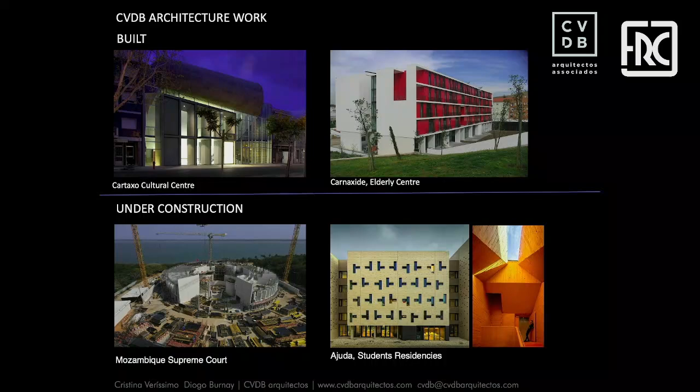Our work is mainly public work because we work through competitions. We apply to competitions, and luckily we win quite a few. Just to give you a few examples, the ones on top were built.

The one on the right is an elderly center. We recently won a competition for a residence, but in this case for young people, so we're going to have another building there. We're also under construction with the Court of Law, the Supreme Court of Law of Mozambique, and this is the students' residencies that will be finished next week or so, it's almost done.

We also, like Sergio was explaining, had a wonderful experience with the Lisbon Triennale, which we called Terra, about issues of the planet and transformations, and what we have to think about in terms of architecture. We had a wonderful team of curators, with 5 exhibitions and 5 teams of curators. It was quite a huge event that finished in 2022.

We are now Biennale curators for Latin America, which is going to take place in Peru this month. So, this is now.

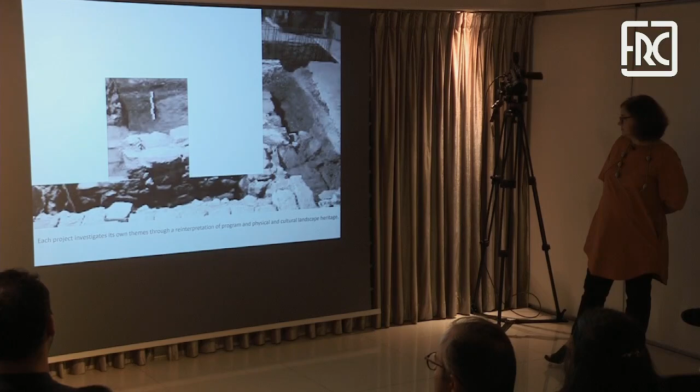So today we're going to dedicate this lecture to our heritage work. We're mainly focusing on a few topics, such as in terms of architecture, how can we create a balance between what we manage to do and the existing buildings. Remember, we're in Portugal—public buildings, not a lot of money—so we have to create the best with very little. We always look into what exists, so it's a constant survey of the existing building, and sometimes in one design we find archaeological items that we then include in the design.

Improvement—of course some buildings are in bad condition, some are in ruins. We have to adapt them to the legislation now, and we always want to preserve them for the next generation. So seismic laws and structure need to be included. The design character is always the symbolic means between the old and the new.

We're going to show you a few different things—how do we deal with that? Proportionality of interventions: how do we keep, and how do you select, basically.

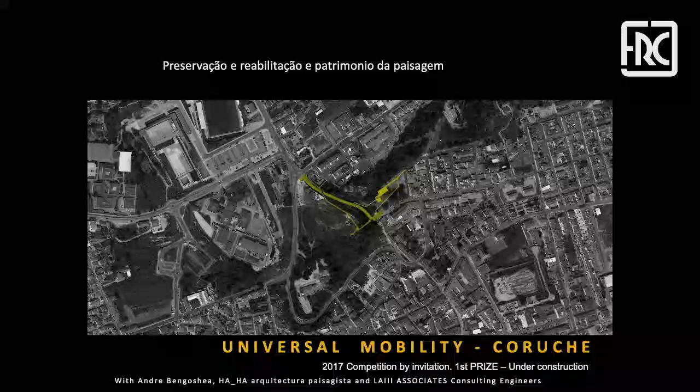There used to be a castle over here, and now what they kept is pretty much this area, totally green, as you can see. This is the old city, and this is the new city. What's important for you to understand is that this city, from the low part to the upper part, is quite a huge step.

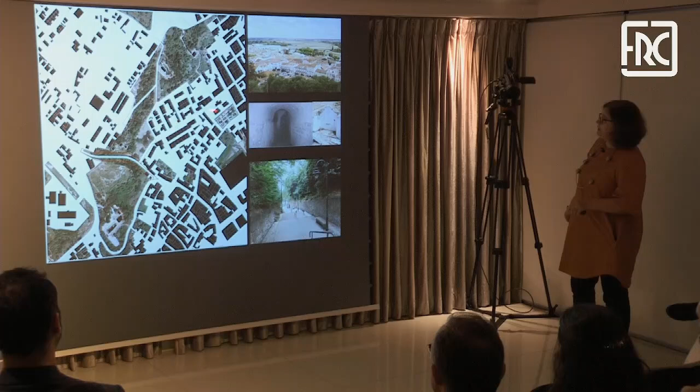The town hall came to us and said we need to have universal mobility—our old people need to go to the hospital. Most of them live down the hill or in the old city, and our hospitals, schools, and administration are always on the top side of the hill, so people always go up and down.

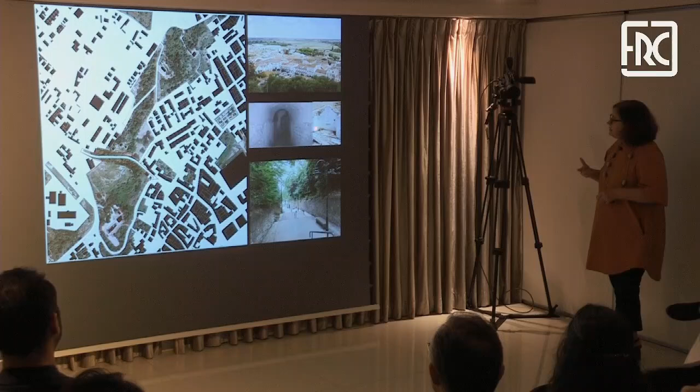So this is the view from above; the river is over there. Now, a long time ago, Gonçalo Ribeiro Telles rehabilitated the underground of this area, which contains fresh water for the population. It was done through an underground system that we visited, and sometimes there are fountains over here.

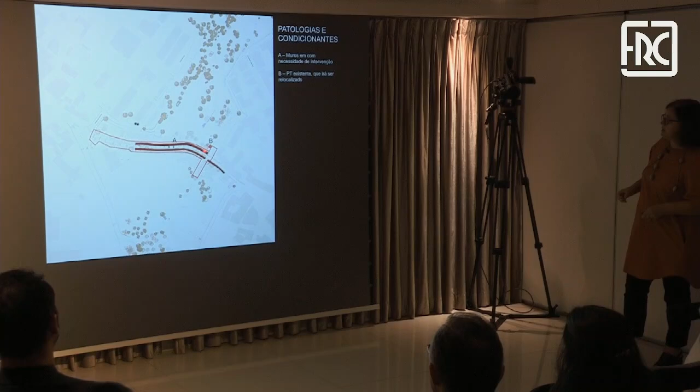One thing you'll notice is that the staircase was pretty much collapsing. The population did not want us to change anything. Even though they were coming up and down, it was very hard work for us to explain to them that very soon the cliffs might fall down, so we had to do some maintenance and recuperation. For me it was a long, hard process between administration and the population, because they didn't want anything touched. After we started talking to them, they shared what things they were interested in keeping, and we were very attentive to that.

We had a huge area, like I said. In terms of natural areas, a lot of the trees were not local, so we had to separate and clean the species, the natural vegetation. We also included wet areas such as fountains and paths, which the population was very pleased to find out. And this is the staircase that we rehabilitated.

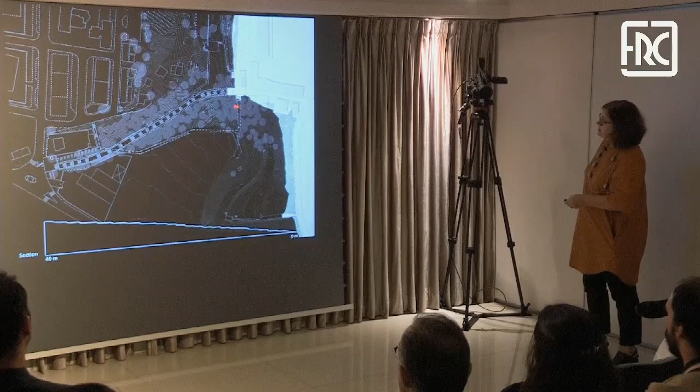By universal means, we included an elevator. That was also discussed with the population, and they really liked the idea. On the left side are the existing areas, and these are the bridge, paths, and fountains we rehabilitated. They're still under construction, so vegetation will grow, but this is what we're doing. The next slides will show you how steep the slope was, 40 meters, that people had to walk up.

This is a sequence from the elevator to the top, showing the universal path. People go up through the elevator and keep going up until they reach a platform already on top of the hill. There's a sort of viewpoint shown in this model. Then the universal mobility path goes across the staircase and reaches one of the highest points there. So universal access was achieved by creating this path that brings people vertically and then horizontally to the connection.

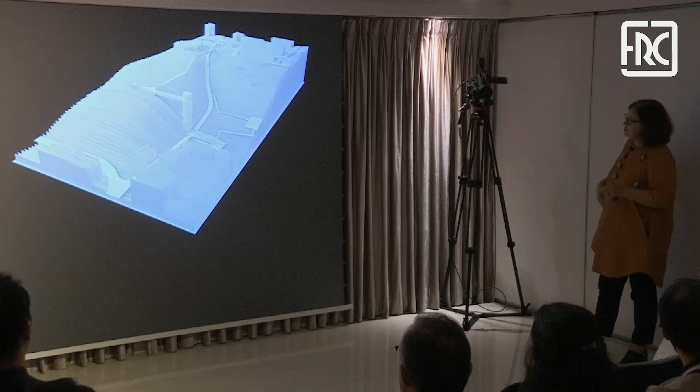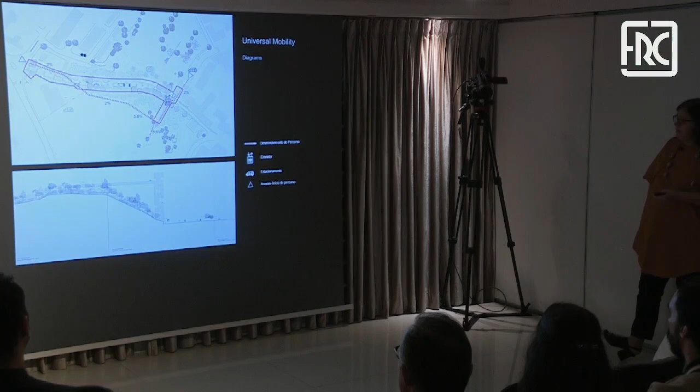The elevator is very simple. It's just a vertical tower with viewpoints and transparent spaces for the population to enjoy the view. And as I showed you, it's an amazing view.

So this is another interesting situation, in the city of Torres Vedras. This was the location. Interestingly, this was pretty much a row of houses, with a building in front of a square, and the population, not unfriendly but out of habit, would literally cross a private property to go up to the other part of the city. This is the lower area. They would cross through the building and go up. So it was, let's call it, an informal connection.

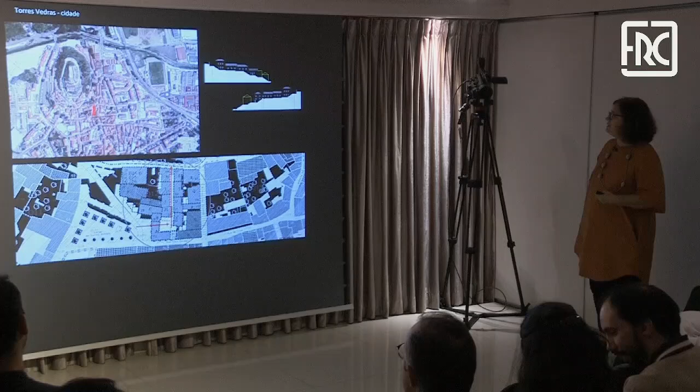When this art gallery project came to us, we said, why don't we turn this public? Instead of keeping it informal, why don't we turn it into something formal, with the advantage that we can create an art gallery? So in terms of design, it's like almost a box inside of a box, but we allow the public connection to go under, across, and up.

Now, to bring art to the population, as you can imagine, was very successful. The population would go through rooms in the building that of course had art, but they would interact, and through their path they could see art, which was very successful.

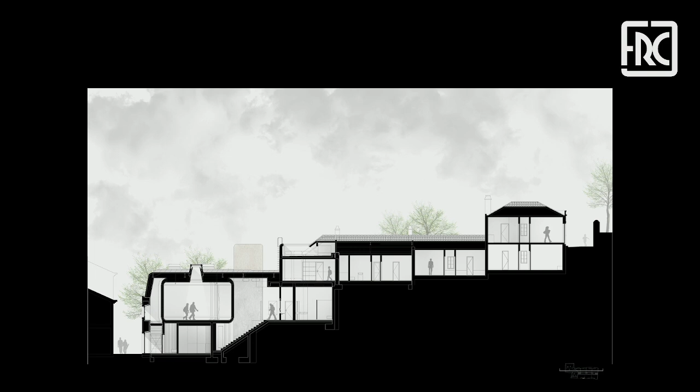The intervention, again, was very simple with very little means, and this is already an exterior staircase. This is the street that we turned public. Several houses are in fact part of this art gallery, some for artist residencies, some for administration, and the main exhibition areas are these two spaces. As you can see, in terms of topography it's a very steep site, and yet very popular as a shortcut from the lower area to the upper area.

We did this project, in terms of team, with Pedro Gadanha, I'm sure some of you know him. The design idea is the box inside of the box, almost as if the public space is this neutral white color, allowing a lot of interventions and different things, while color is always located in specific areas of the intervention.

We will do this a few times.

So this is a competition for a school at the edge of Lisbon, located in an area that used to be just farms and agricultural fields. You can see this is the second ring road. One recognizes the football stadiums, and we could easily map what used to be kind of the old path across the fields, and how that is still somewhat perceived along the street that connects to several buildings.

This area is very much residential, in Telheiras in the northern part of Lisbon. The competition called for the refurbishment of this old convent. The convent had one of the wings that was a church, and the other two wings were completely abandoned. So this was the derelict state of the convent, and you can see there's a series of additions through time, and there's the fence.

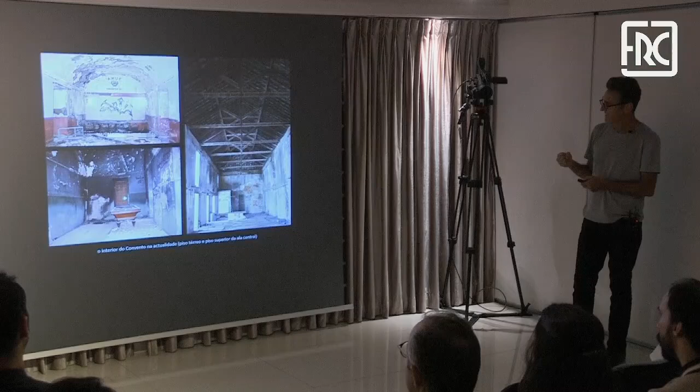This is the German school, and you can see the surroundings of the residential projects and areas around the convent. It was in a really bad state, and as Christina already explained, for quite some years now, seismic considerations need to be taken into account whenever we touch an existing building. So this is the site.

The interesting thing was that the Lisbon Underground runs here, so we had a lot of restraints regarding the presence of urban infrastructures. We looked at the convent as a source of inspiration, in that we looked at the courtyard as a way to organize the building and program and life within this place, and established a series of strategies that expanded on the theme of the courtyards to organize the whole school.

The school ranges from a nursery to 12th grade, so it has a wide range of ages, and we had to separate the courtyards and the playground areas just because of regulations, and also managing all these young children playing around at different times of the day.

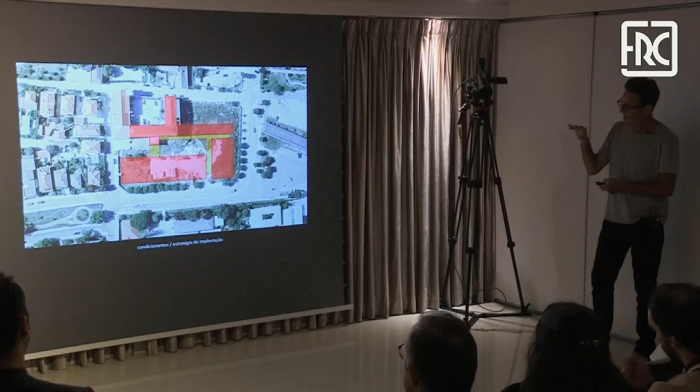So around the edges we set up a series of paths, allowing circulation to connect the different wings, but also for circulation to always be close to the playground areas. So this is kind of the strategy.

We were very concerned about the height of the new buildings. This big body here is the gymnasium, which is sunk a floor down, so we could still see the height of the convent free from any new buildings.

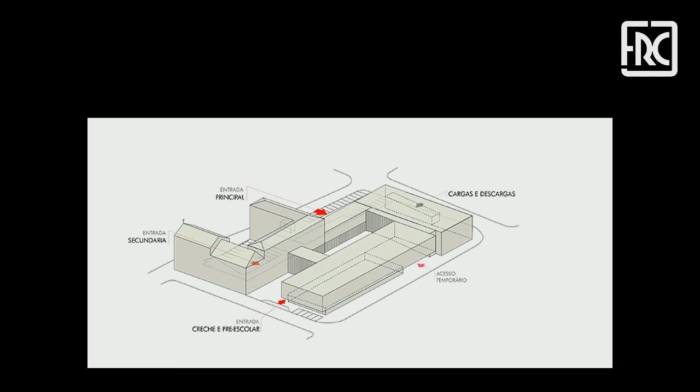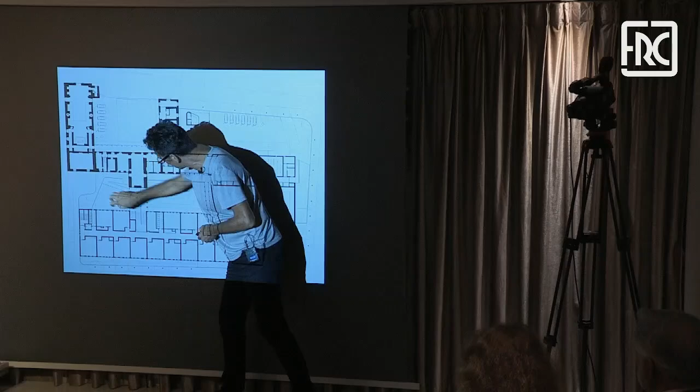Here you can see the several courtyards. This is a kind of main entrance, an open courtyard, obviously we couldn't construct anything here. We refurbished these wings. This is where the main library and the administration are, and this is where the classrooms are. This is the youngest children's playground area, and this is the rest of the school's playground area.

So what we can see is a series of ramps, verandas, and circulation elements that stitch the whole school and the different courtyards together, also trying to make connections that would still be quite transparent, so we could see through the different courtyards.

In a way, what we were concerned with was to establish a sense of holistic understanding of the school, where most of these kids enter when they're 2 or 3 or even younger, and leave when they're 15, 17. So you build a lot of memories by using all these different spaces as you grow older.

And obviously issues about how old and new touch, so alignments, and we were very much concerned about keeping our additions as low as possible. So if you remember the photograph I showed earlier—another thing, this is the main library.

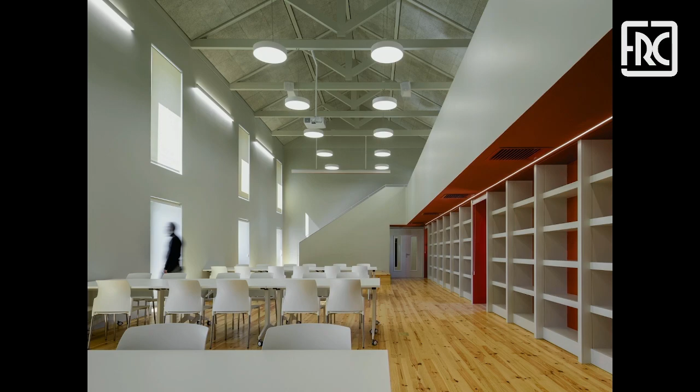Another thing we were interested in was celebrating the old construction techniques, so all these wooden structures were refurbished. For us it would make sense that this part of the building would be as public as possible, to be enjoyed by all these generations of children throughout all their years at the school. This is the attempt of lowering the building, having a very horizontal line that highlights the convent still as one of the oldest buildings in this area.

I think it's me. Yeah. So, oh no, Diogo, you go.

So this is an interesting competition because of Arraiolos tapestry. Arraiolos is the name of a city, a small town southeast of Lisbon, and it has a very particular tapestry that bears its own town's name. They organized this competition for a small building—one cannot call it a museum because it lacks some programmatic elements that constitute a museum. It's a center to interpret the tapestry of Arraiolos.

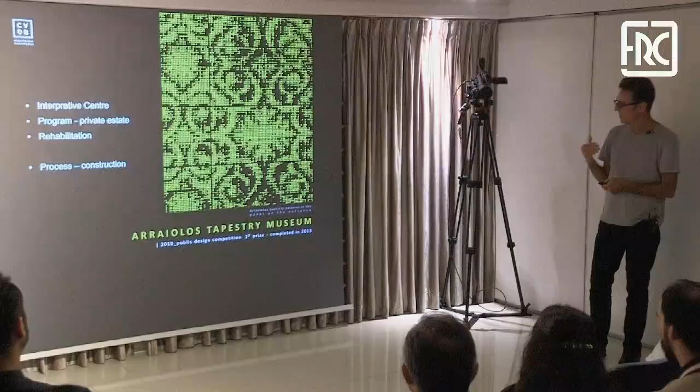So we looked at these very strong Moorish patterns that have existed throughout time as a way to inspire how we could organize the museum.

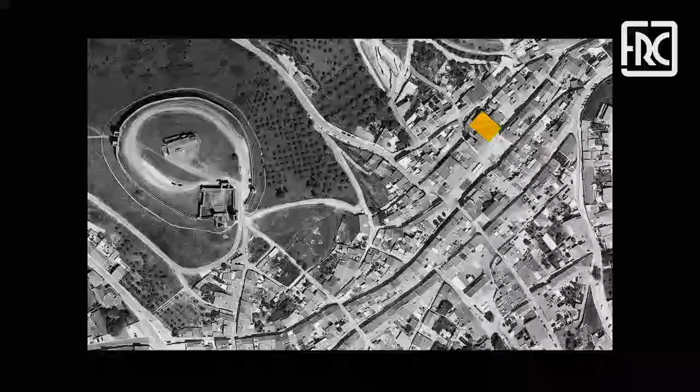The museum is located in the Arraiolos main square, where the town hall is located, and it's a site where the castle is very prominent. This is how the town celebrates this tradition, and the museum is right there, next to the building we see on the left, which is the town hall. When we looked at this, we felt the building had a really unique presence in the city.

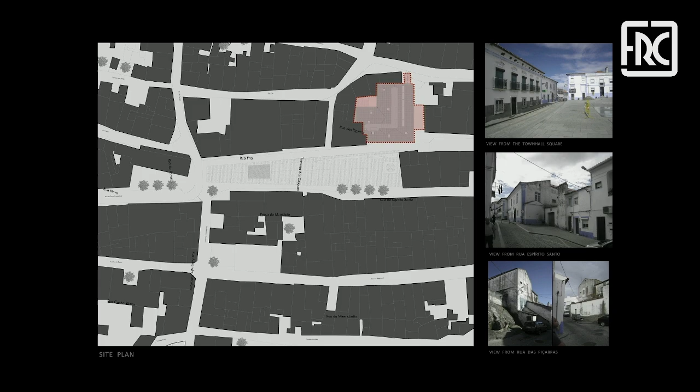This building used to be a hospital with two courtyards, built in the 12th century. Courtyards were graveyards as well, so when we had to reinforce all the foundations, we came up with a lot of skeletons under the ground. According to archaeological legislation in Portugal, one needs to stop and document everything, and this was a tremendous question we had on site.

The building is organized simply: the ground level is where all the public programs are located. By doing research with an archaeologist consultant, we realized—this is one of the courtyards, that's another courtyard—that this building had been a police station, social security offices, and all these courtyards had been built and occupied throughout time.

We realized this central courtyard was really crucial, because by reestablishing this void, we could organize a whole program around it. You arrive, take a few steps, and get to this space, which is a void, with circulation above and below always returning to this central element—the stairs, the lift. An interesting component of the competition program was the artist studio.

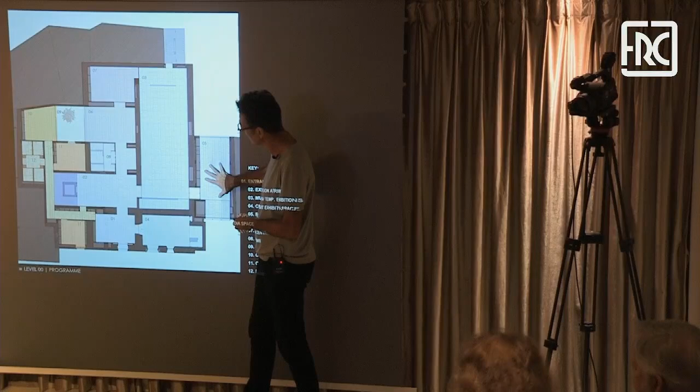What they wanted was to invite artists to generate new forms of tapestry patterns through digital artwork. That's one courtyard, that's another, and this is the educational spaces, the multi-purpose space, the educational room. We always felt that big glass panes here, although complicated in terms of structure and maintaining the existing walls, would allow the public and the artists to be connected with each other.

The stone on the floors and walls is all local stone from Alentejo, binding the ground floor as one entity. We're just going to see some photographs taken from different spots—the staircase, the first courtyard I'm talking about—you go up and have this little veranda to look out.

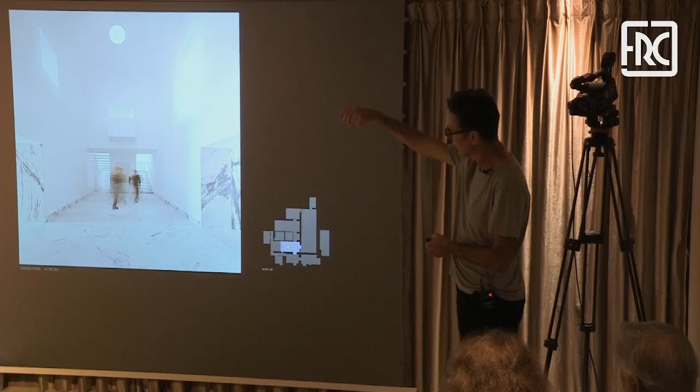One of the things we managed to do was align the windows above, so we would loop on the floor above around this courtyard, and just by the sheer alignment of the walls and windows, be able to see through the town hall and onto the castle within the museum.

The other interesting thing was that this was not a place to exhibit paintings, so the protection of the exhibition content in terms of filtering daylight was very different from a typical museum.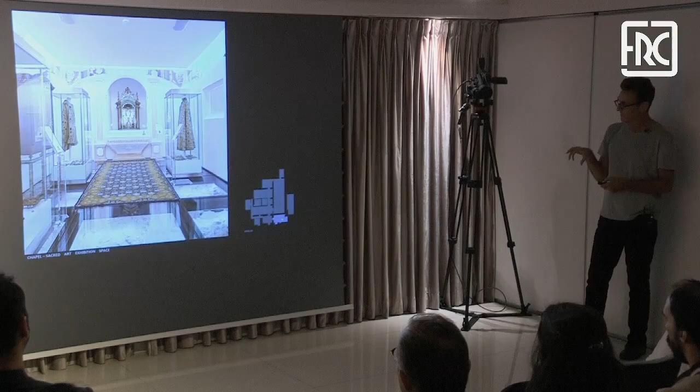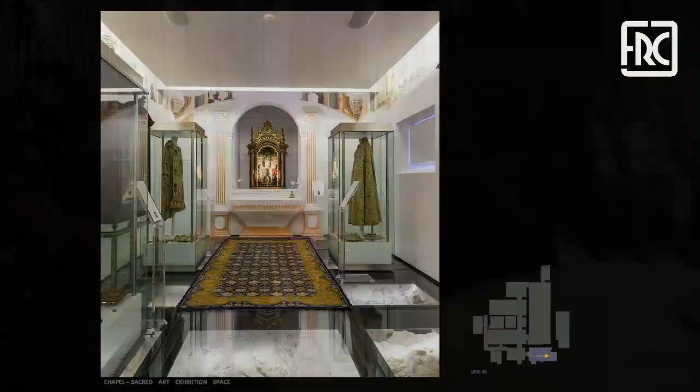That's the first floor. As one can see, the exhibition spaces have wood flooring throughout, and we can loop around—you can see the alignment of the windows—and this is where the permanent exhibition is located.

Another interesting thing for us was how we designed the ceilings, combining and allowing for a mixture of natural and artificial light. There are all kinds of skylights at the center of these spaces. This is a wooden structure that was kept, with artificial light allowing some artifacts to be lit from the edge of the walls.

Again, this is one of the spaces where we kept the wooden structure of the roof, and this is how these spaces are being filled in with content.

This is the facade of the educational room, and we were working with a historian who had done a lot of work with this tradition. He picked up a tapestry that we followed and developed a pattern that reproduced the tapestry as a facade. The bottom panels are doors that can open, bringing the tapestry to an urban and architectural scale.

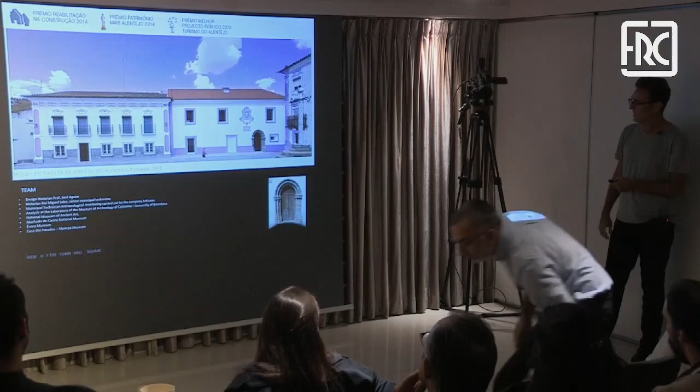These are just examples and drawings during construction, photographs of the building and construction. We had to gut out the building completely, and these are images of the new facade. Using pigmentation, color, and types of mortar that would be respectful to the old buildings was also quite important.

Yours now. Okay, thank you.

This is a totally different project, and I can explain why. This was a school, part of the Parque Escolar, a government program to renovate schools in Portugal. Around 100 and something schools were renovated. We managed to get this school, and there was an intention of the team of designers to keep as much of the existing school as possible.

The location of our school was very particular. There was a huge valley, a main road, and the main entry for the school was here. In terms of the school's relationship, we had meetings with teachers, and they said the school doesn't work, that they don't want the pavilions because it's very windy and they can't dwell outside. The teachers even said there was no way to go from one side to the other without getting rain, so the classrooms were separated.

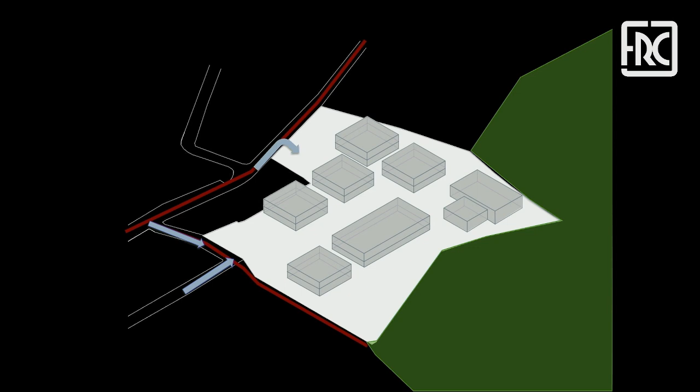But this was the intention of Parque Escolar, to keep this. So after listening to the population, we decided: if this is the existing school, let's subtract the parts we can't keep. Some were additions made in the past, and the engineers told us they would collapse, so we had to demolish them. Then we decided to keep the maximum we could.

What we did was, through a stitching process, an interweaving process, create a new building that would connect all the existing volumes. This is the gymnasium, and those are classrooms.

There was also a problem with the topography, which was not flat. Since we had to create universal mobility within the school, we had to find a way to allow the valley to enter and ecologically refresh the school, while the new building had to deal with the existing buildings in a way that they would be at the same level.

So what we did was decide to create an outdoor space. The students were always telling us they needed a place to be, and they even suggested 'Learning Square' as the name. There was a connection with the valley and the topography, and we designed a school where you see the existing buildings are those.

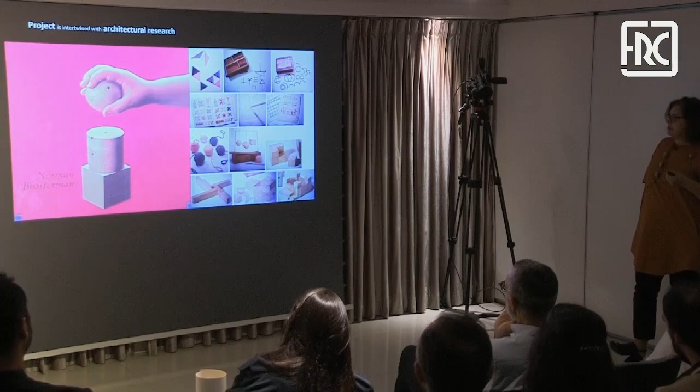This is a playful thing, because in the office we said, well, what if this is a game? What if the children would see architecture as a tool or as a game? So we went to these mathematic games, and we started to design the classroom.

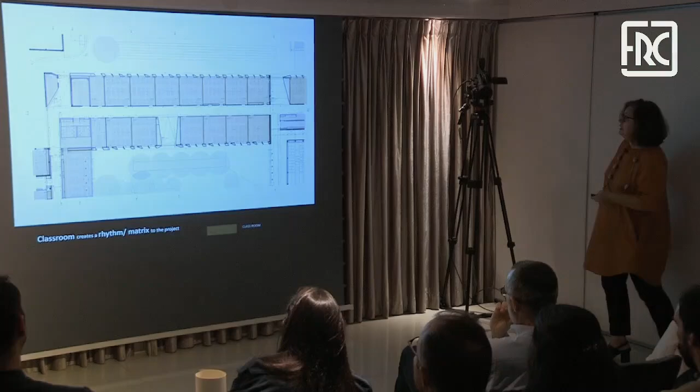The classroom has multiple possibilities of organization, and was studied according to sunlight, etc. It became like a type of Lego that is always the same, playing a certain tune which repeats constantly. In between those repeating rhythms are the exceptional spaces, which we call the learning spaces—the informal areas.

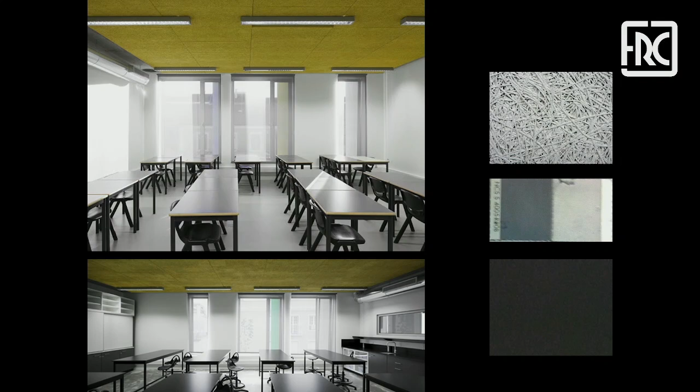This classroom, of course, is very neutral—the types of materials for insulation, the colors and everything. We even had our consultant telling us that the classrooms could not be white, they are gray. If you put a white paper on the wall, you can distinguish a slight color of gray, so that the pupils of the students would not become too dilated and they would fall asleep.

So anyway, you see these details that we went through, and these are the examples of those particular spaces, which we call informal spaces.

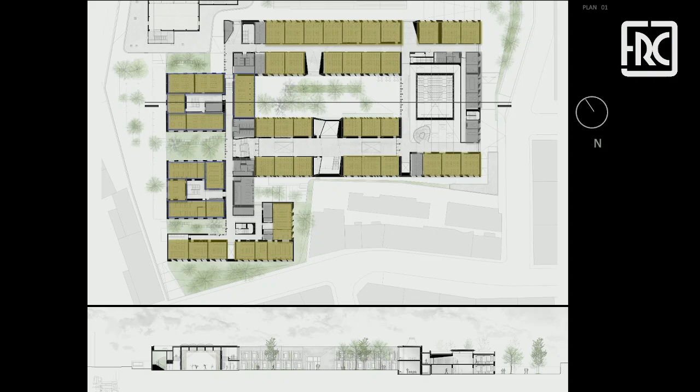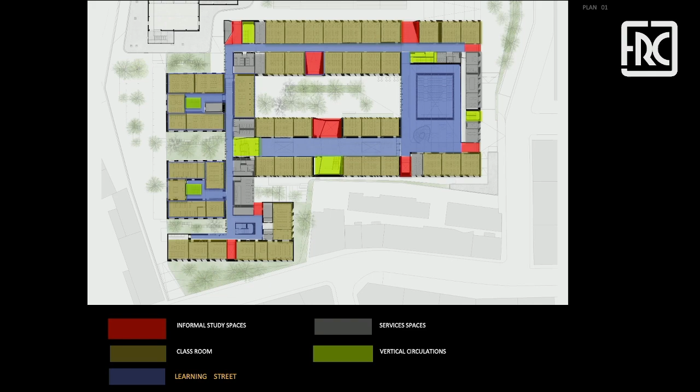The school is organized by that. If you look carefully, these repeated classrooms are the existing buildings. So in a way, the DNA of the existing buildings became the DNA of the school. You don't necessarily see them totally, but they exist and they are there. The school is organized with the classrooms in brown color, the informal study areas, and the circulations, which we make as if they were streets of learning, since we had a square of learning, and then auditorium, main entry, and so on.

The informal spaces start to have different design, different headrooms, and locations in relation one to the other, so those will be the ones that the students understand. And this is the example of the learning square.

As I told you, we tried to make this as cheap as possible, so the cement blocks are organizing the corridors and everything, and this is an acoustic cement block that we managed to organize too. I'll tell you a little bit more about that later.

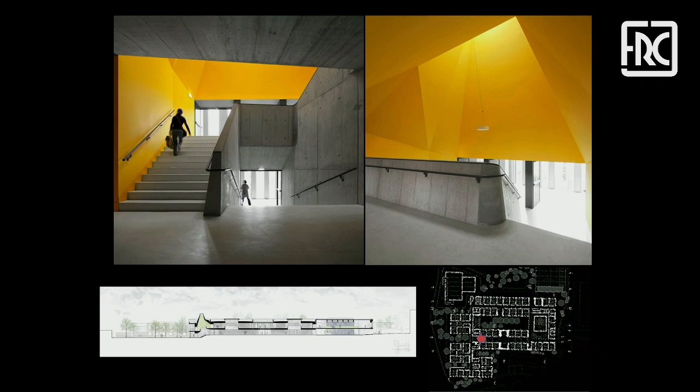Circulation, vertical circulation, points of reference for the students. This is the only moment the students have to go up and down, therefore there is an elevator there.

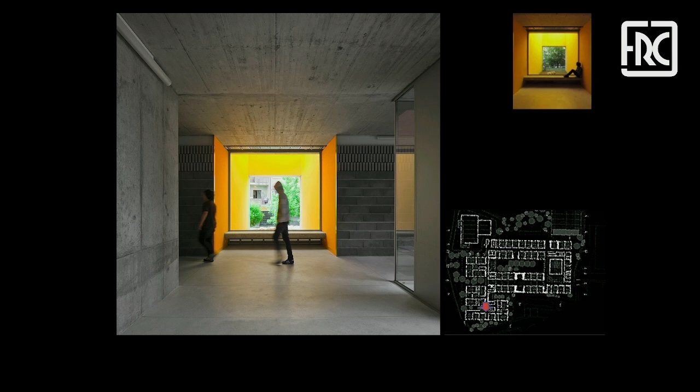This is another informal space that we created as an auditorium in good connection with the landscape, but this we would expect them to use for arts. This is another informal space, a little bit of Barragán inspiration I would say, but they love to be there by themselves. So there's the possibility of those spaces being used according to what the students need.

In terms of color, we had João Nuno Pernão, an architect who studied the colors with us. We used primary colors, and they were distributed through the building according to that.

So this is the cement block, which is acoustic like I told you before. This was just used for parking. It was a very cheap material, only the color was pink, not very well fabricated because there was a lot of porosity, and this was specially for industrial areas.

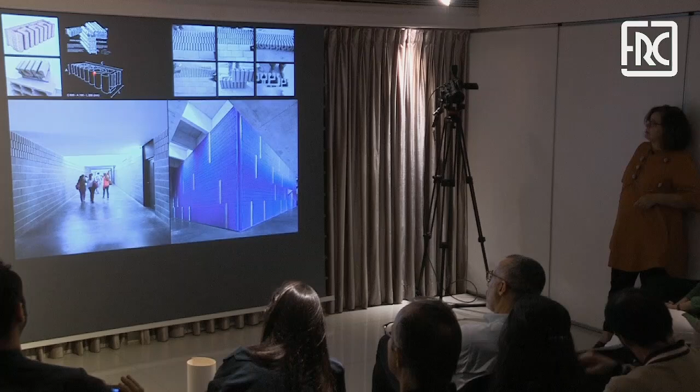And we asked them, okay, can you make it better? Can you have it as the same gray color, for example? So in working with them, we defined this strategy of a cheap block. Acoustically it would work fine and would allow us an important thing, which is they told us, okay, if you need this to be a little bit higher than that row, it's okay, because it's just a matter of putting extra cement or not.

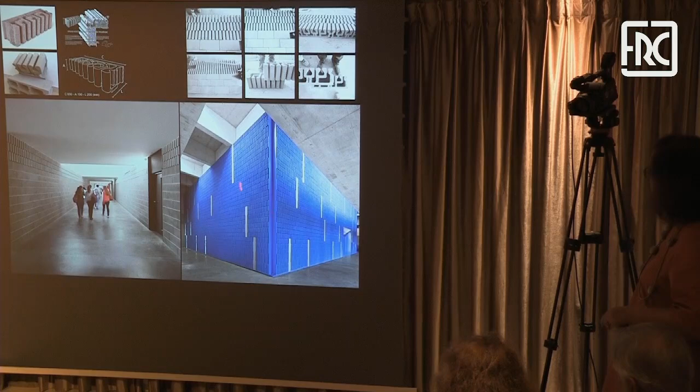That was helpful because the existing building was there and sometimes the heights were not the same. In some cases we painted, and this is the auditorium. This is the main entry. Sometimes you have the skylights open, the light comes straight from above, and this is the staircase that takes them up to classes, and also through this corridor they will go to their classes.

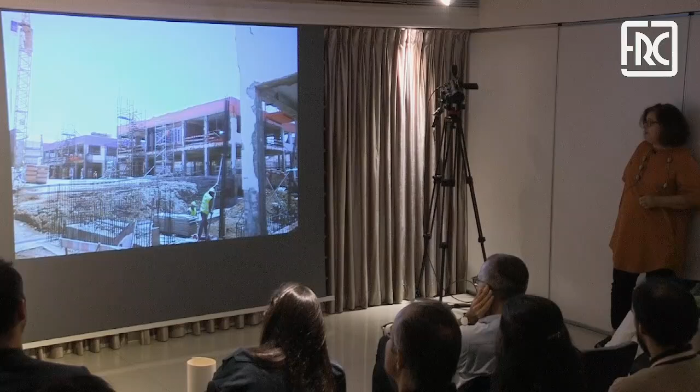Now, the existing buildings were very hard to maintain. In terms of seismic possibilities it was very hard, and we had to almost take them down to the structure, and then we reinforced the structure, and then we added to the buildings.

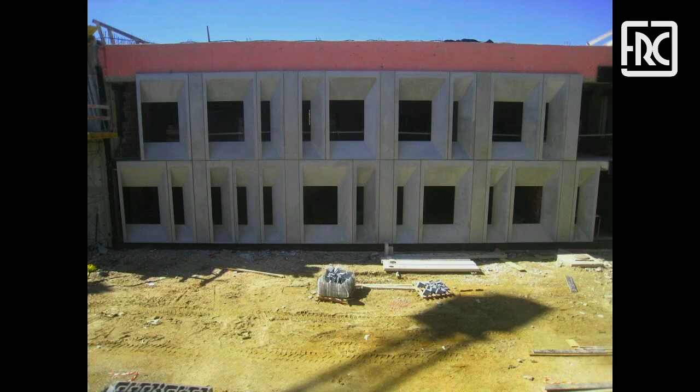Over that, we designed these panels. And if you remember the children's game we were doing, the matrix is always the same. So these panels, there are only 7 different panels that can be organized in different ways. So it doesn't seem that there is a lot of repetition, and yet they play all the same tune in order to arrive.

Prefabrication - we also designed the panels in order to have the maximum number of panels in terms of transportation. So that was designed, and also how you place them on site was very easy to apply.

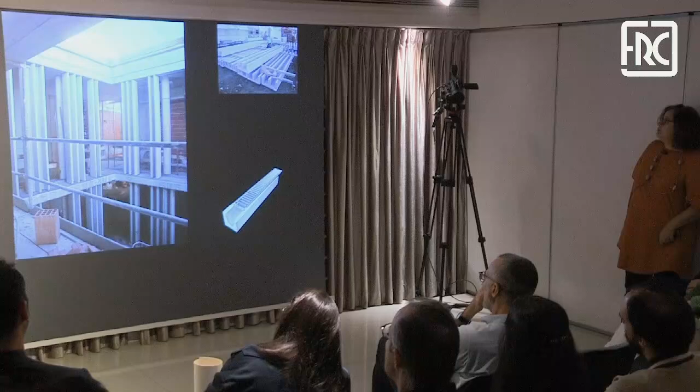This is another interesting thing. When we were visiting the factory, we saw this on the floor. So this is a gutter, and we asked them, can we turn this into vertical mullions? And of course, there they are. So it's an industrial fixture that became a facade element.

This is the courtyard of the teachers. Again, we organized the school in order to have different opportunities for the students to dwell, but also for the teachers. This area is a shortcut in terms of service areas for the school.

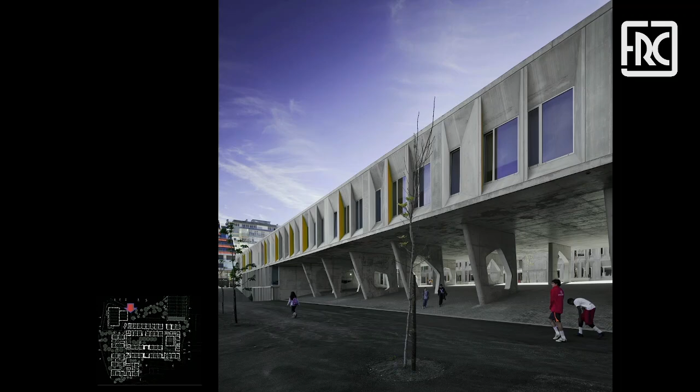And this is the main square, the one that the students call the learning square. As you can see, there is a slight slope. And then there are also these hollow points that we call the colonnade. The colonnade became a dwelling area. It was designed according to the human body, and the students can dwell there as they like.

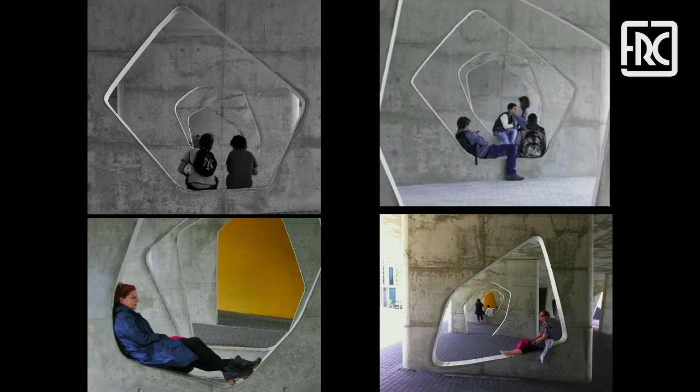And so the color is another thing that we did, because there is only color on one side. So if you look from the other side, you don't see any color, like in this facade. And yet, when you are there facing this way, you don't see color this way, but you will see color that way.

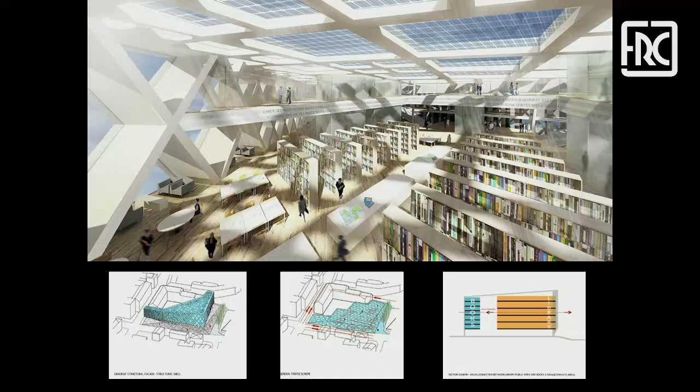So, another way: in that project, the old became the DNA and the new took over the old. This one was a very hard competition, because the site itself, the ground area, was pretty much an archaeological site. So all this, the facade and everything, stands in the air, because even if it's a library, the important part is that the archaeological findings are underground.

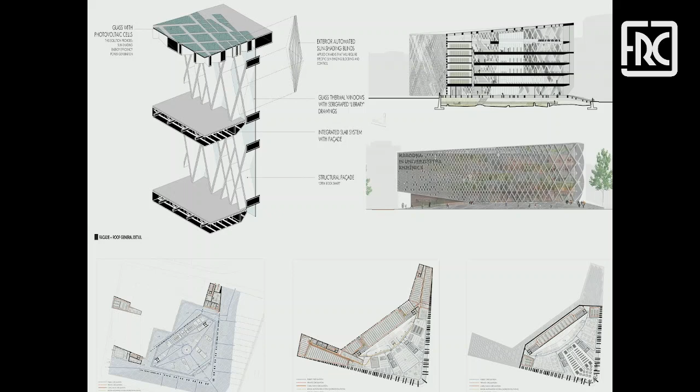So all this building is a sort of shell that does not touch the ground in the middle of the building - only on the edges of the site can we have structure, so that the building floats above this archaeological site. In this case, we brought it here because it's a condition where the new became a sort of floating device to shelter the importance of the old.

So this is one condition that is very rare to happen, but we thought it could be interesting to bring it up to you.

This is the last one. This is a competition - a national, open competition. We got the first prize. And it's for this megalithic museum.

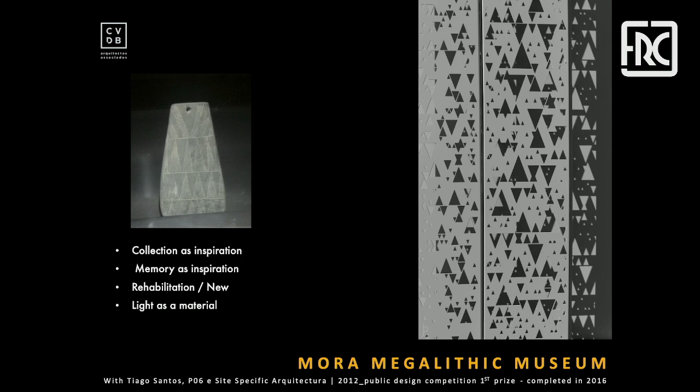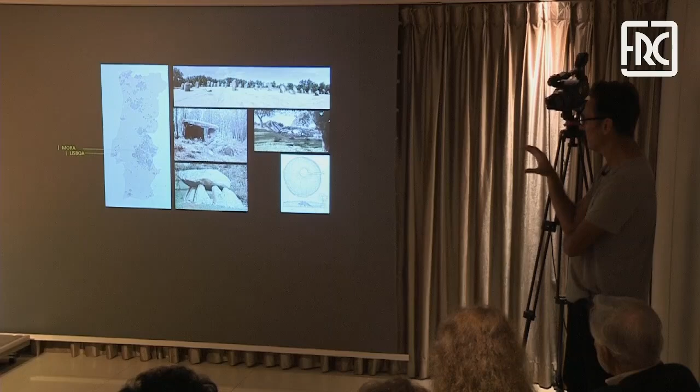In Mora, which is east of Lisbon, apparently one of the highest concentrations of megalithic archaeological findings exists. When we got the commission to do this, we worked from day one with an archaeologist and a historian, so that the artifacts and the content of the exhibition spaces would always keep in mind that there are a lot of small artifacts that can be exhibited in the building, but the experience is to go out to the landscape and see the work in the field.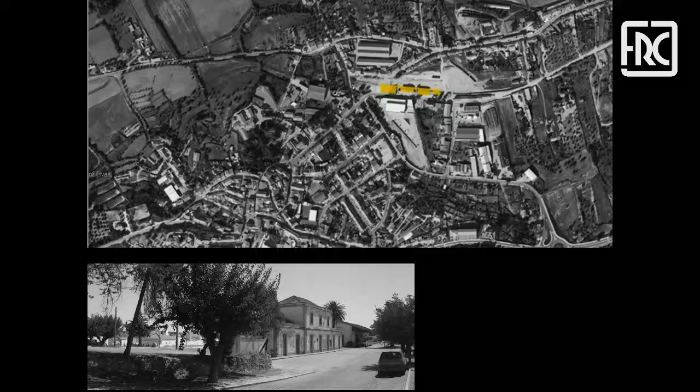The interesting thing was that the site of the competition and the site for the museum was a former railway station, abandoned for quite some time. One can see the railway tracks, and there were a series of pavilions - a main station, a warehouse, and the public washrooms. We had to decide what buildings to keep and what not to keep, and the program introduced a permanent exhibition space, an administration building, an educational space, and a small cafe.

So we looked at this building. We wanted to keep the character, the scale, and the feeling of the presence of these buildings. A lot of these buildings are designed just the same and land on every single small town, but we were interested mostly in the scale of the main station, and the exposure of the wooden elements of the warehouse.

So one of the questions was, how do we add something that you can see from the building on your left and the building on your right, that is more than double the existing built fabric, but is still respectful of the scale of the site.

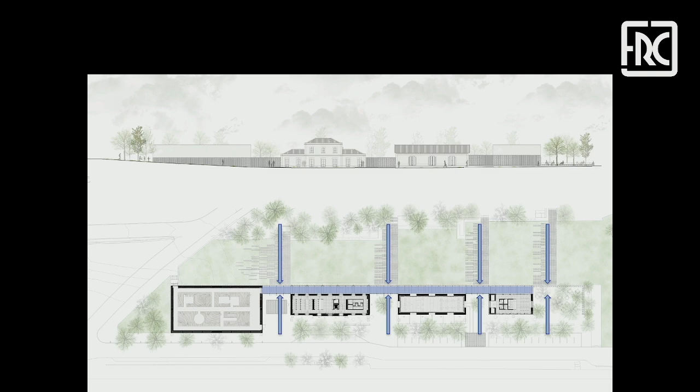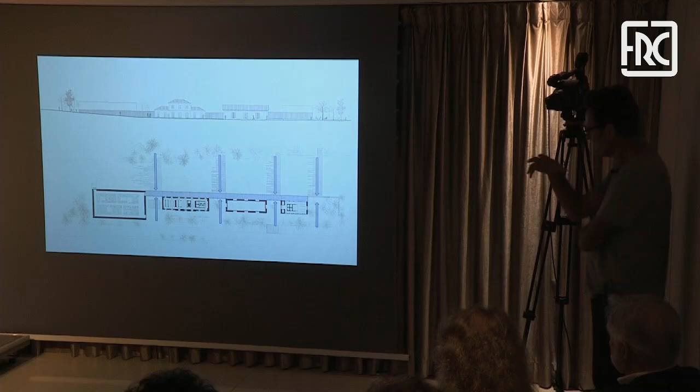One of the things we thought about was the platform where we would wait for the trains, and use that platform as the linking element between the different pavilions. This allowed us to separate the buildings, not to have one single building, but continue this idea of several pavilions - the width isn't that different. By having this fabric a bit transparent, we could mediate between the scale of the site, the landscape, the existing buildings, and the whole new project working together.

Also, part of the site had an urban design for a park developed by a landscape architect that had nothing to do with our project. But we were very concerned, at least on this site where the main entrance of the museum is located, not only to design the program for the museum itself, but to design the public spaces in front of it, so that we would integrate the surrounding spaces as much as possible as part of the project for this new building.

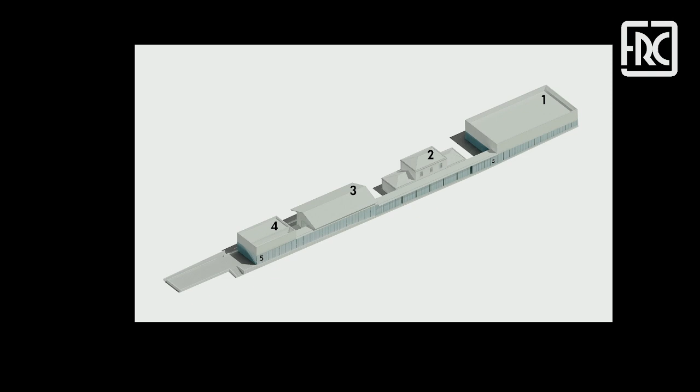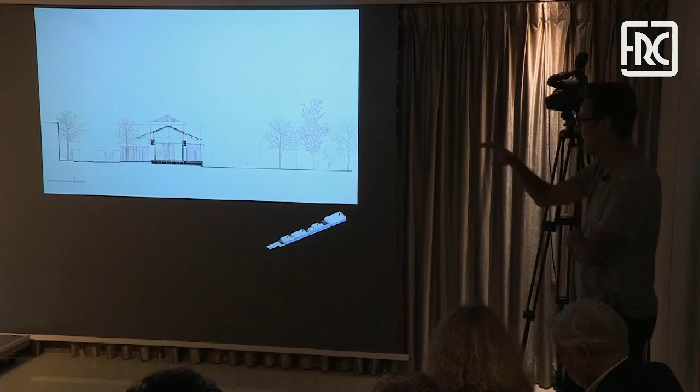So this is something you can see from the park, this element that stitches the whole project together. It is built on top of the former railway platform, and then the park mediates between the street and the different levels of the landscape.

Here you can see the warehouse became the educational spaces where the structure is very much exposed. For us, it was an opportunity for children to not only learn about the megalithic, but also to slowly learn about how the building was put together and about the architectural elements of the museum.

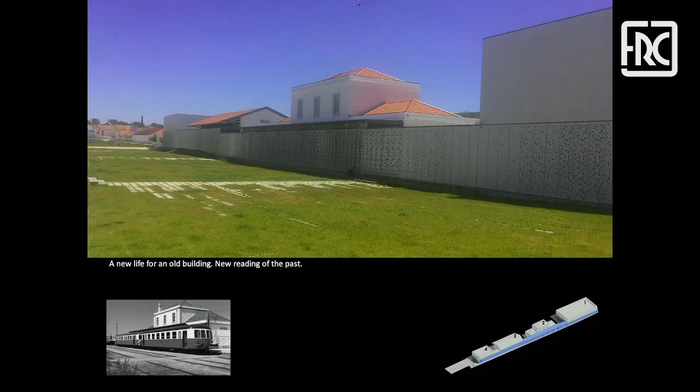Here you can see opening day, how the building opens up to the city, to the town of Mora, and how these several elements help characterize and respect the scale of the different buildings within this place.

We worked with lighting engineers and designers so that the structure would be highlighted, and the patterns I'll talk about in a minute were also a way to bring light inside. The corridor is still an outside space, not an internal HVAC treated space, so air could flow between the buildings.

We looked at it as a source of inspiration to define a series of patterns that would help characterize these facades. The great advantage with nowadays technology is that we could do this with no concern about repetition, so every panel is a different panel because they are mainly plotted and cut through a laser cutter.

We worked with fabricators to think about the diversity of panels—I think we have about 16 different panels. The only concern is sometimes the gaps between them, certain things if they are too fragile, but just the integrity of the panels, and also avoiding elements that if they were at a certain height could be somewhat hurtful for kids as they move along.

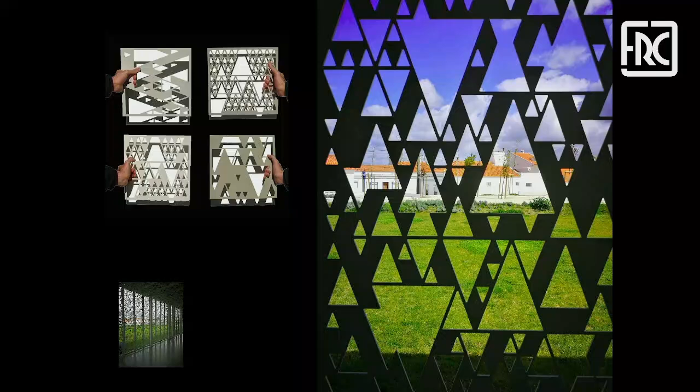This also creates a series of filters between inside and outside. We always ask for prototyping, so several tests of more opaque or less opaque and slightly different colors to tune how this thing would present itself to the site.

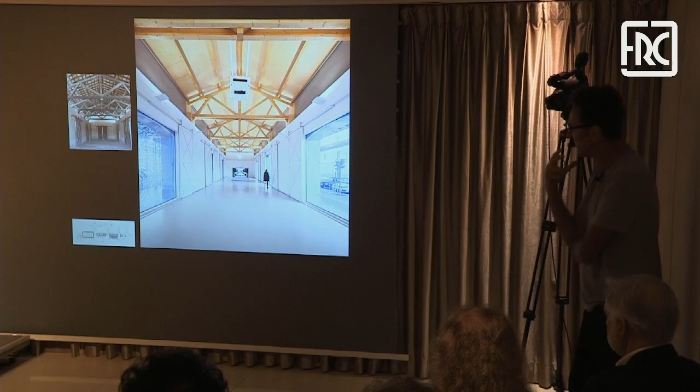You can see that the existing warehouse was very much kept, and the wooden structure was very much kept. The only difference is that all of it had to be reinforced structurally because of seismic reasons, and thermally speaking this building cannot have any cold bridges, so we had to thermally insulate it, structurally reinforce it, and still keep it very open to the city.

So we were interested in having these big windows so that people would be able to walk along the sidewalk and see what kind of activities could be taking place indoors.

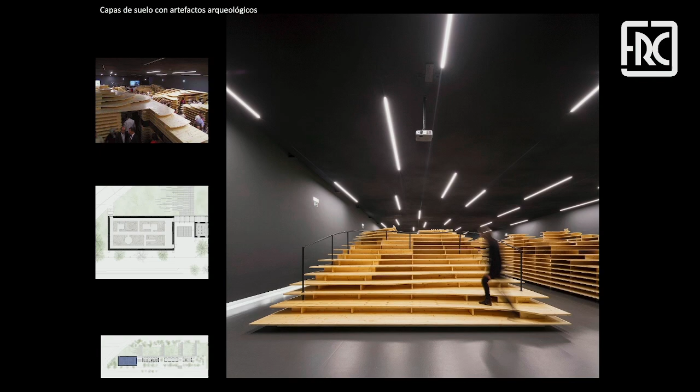We worked with exhibition designers, P06, and their contribution—this is the building on the left-hand side—was quite amazing, as they thought about this idea of sedimentation and playful sedimentation, so that all these layers of wood is the place where the small archaeological findings were going to be displayed. Some of them also allow people to go up and down.

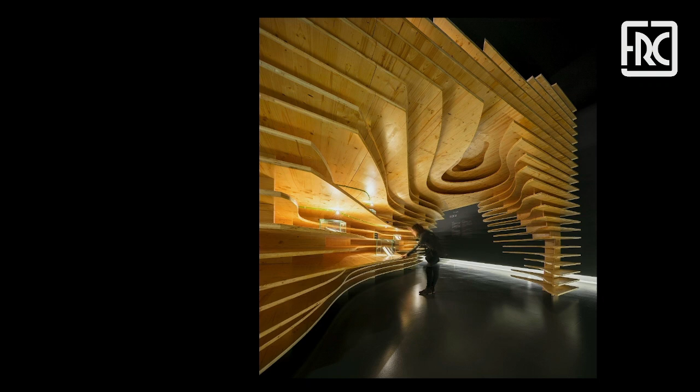So these are not just sites you see, they are sites that you could visit. That's an interesting way of playing with this exhibition design as part of a landscape, to accommodate not only how objects would be seen, but also how we could enjoy them, the landscape, as we would visit these sites.

I think this is it. Yes, thank you very much. Thank you—quite sad.

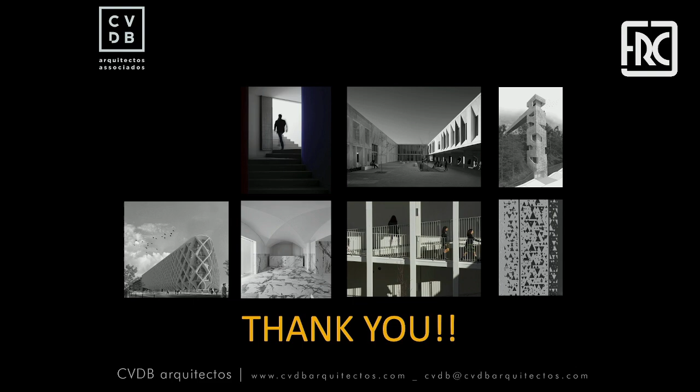I must say that I'm also, thank you for the lovely presentation, but I must say that I'm also amazed with the body of work that you developed these last, I believe, 10 to 12 years. Because most of we know very well, we had offices closed, and this is almost everything new for me somehow. I will not say new, but I mean, I haven't seen all your works put together like this, and I think it's an amazing body of work that you've developed these last 10 years.

And I understand now better, seeing everything together, why you gave the title to your presentation of interweaving. I understand that is something that is unifying most of your works, this idea of interweaving spaces. But I think more than that, that is just not spaces.

You talk about these informal spaces that you always have in your work. And I think it's also kind of interweaving memories. Oh yeah, that's the way you establish it. It's not just spaces, I think you can connect the memories and collective memories. So it makes sense in this idea of preserving the buildings, but also preserving the memories.

So my question I have for you is, going back to Macau, and since Macau is also a city of memories, and you had a long experience here, you've been in different spaces. In which way do you still bring your life experience from Macau? If you feel that you still bring something of this experience to your work of our days, that I understand it's much influenced by this contemporary Portuguese architecture, but in a very unique way. But I think I will be interested in knowing how, after all these years, you feel, and now that you visit again the city, if you feel that in certain way you still have memories from your experience in Macau that might still be perceived in your work.